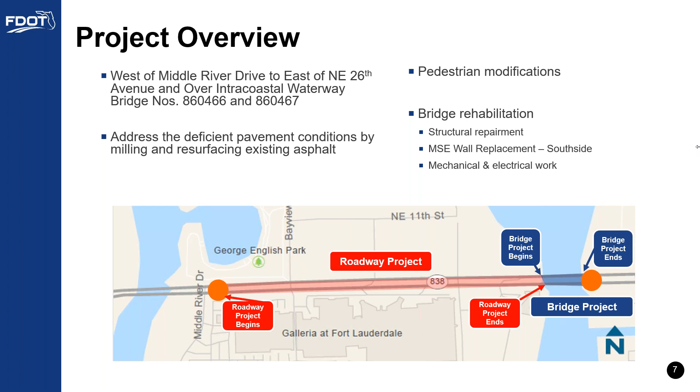The project is located in Broward County in the city of Fort Lauderdale. The project limits are west of Middle River Drive to east of Northeast 26th Avenue and over the Intracoastal Waterway. This project is made up of two components: the roadway project and the bridge project. The roadway project will address deficient pavement conditions by repaving the existing asphalt pavement and other improvements for traffic and pedestrian safety. The bridge project will provide bridge rehabilitation, including structural repairment to the bridge, mechanical and electrical work, as well as a tender house and parking area.

To talk about the Sunrise Boulevard Bridge project, we must discuss the current state of the corridor and bridge and the needs of the local and regional users. The Sunrise Boulevard corridor currently serves as a major roadway for all types of traffic and is bordered by many residential and commercial properties. The current corridor is reaching the end of its life, with worn-out striping on the roadway making it hard for drivers to identify their lanes, worn-out asphalt, and broken sidewalks.

The corridor must be repaved and resurfaced in order to last longer. This process will strip away the existing asphalt and replace it with new asphalt and striping. In addition, it can include enhancements in traffic safety, signing and pavement markings, lighting, signalization, drainage, ADA accommodations, and ITS.

Intelligent Transportation Systems, or ITS, is the use of sensing, analysis, control, and communications technologies in order to improve safety, mobility, and efficiency of ground transportation. ADA accommodations include a uniform walking surface to provide a smoother pedestrian experience.

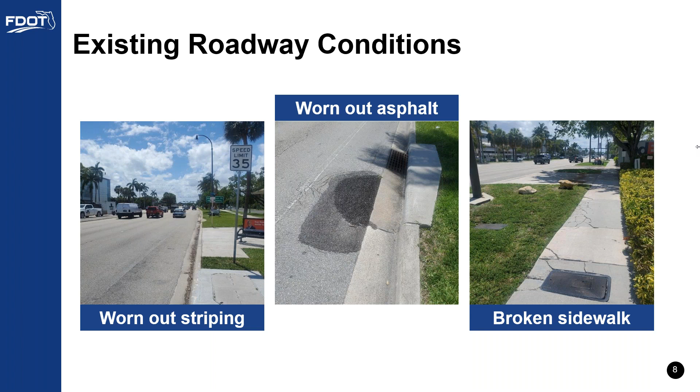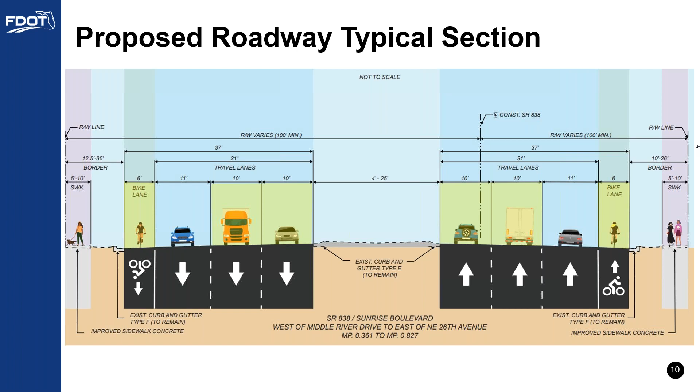The proposed roadway project typical section displayed here reduces the 2 inside lanes from 11 feet to 10 feet in order to widen the bike lanes from 4 feet to 6 feet on either side. The median will remain, and the sidewalks will be upgraded and improved.

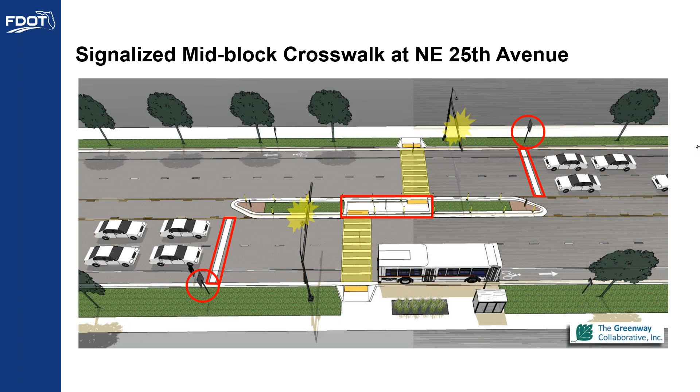Let's watch an informational video from the Federal Highway Administration on Pedestrian Refuge Island. As you watch, please keep in mind that this is an example of what will be implemented. Our mid-block crosswalk will be signalized, so traffic will be stopped in both directions to allow pedestrians a safe crossing.

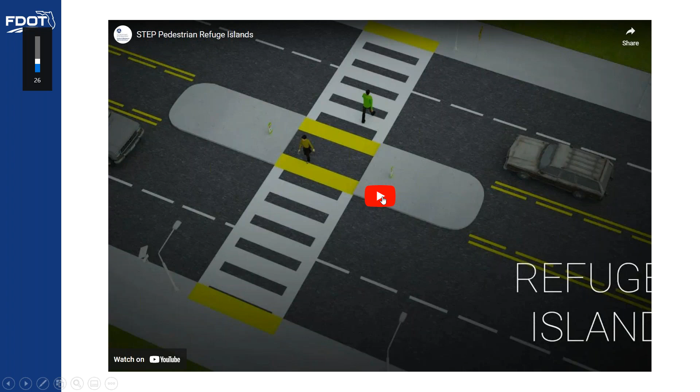In general, a safe place for pedestrians to cross the road is at a well-marked, controlled location, often at an intersection. But in 2016, 72% of pedestrian fatalities occurred at mid-block locations between intersections. So how do we reduce fatalities at these locations and provide safe transportation?

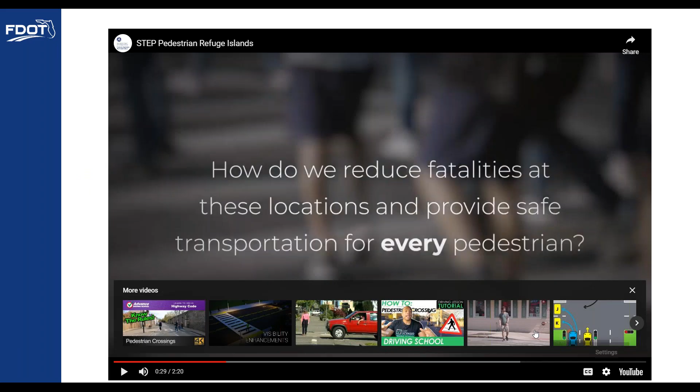The Sunrise Boulevard bridges also currently serve as a major roadway for all types of traffic and maintain the traffic heading to the beach. The purpose of the bridge project is to extend the service life of the bridge and address the glaring needs. The current bridge conditions can use improvements in the structure of the bridge span to create a safer path for pedestrians and bicyclists using the scenic route to access the beach, and the installation of a solid aluminum deck with electrical and mechanical work.

The south side of the MSE wall and the fender can use replacement. MSE stands for Mechanically Stabilized Earth. MSE retaining walls are the walls that line the supporting bases of bridge structures.

Lastly, to ensure safety to the tenders while arriving and departing from their shift, a tender house parking area will be installed near the tender house. As a result of this project, the bridge operation will be more reliable and the bridge structure will be more resilient.

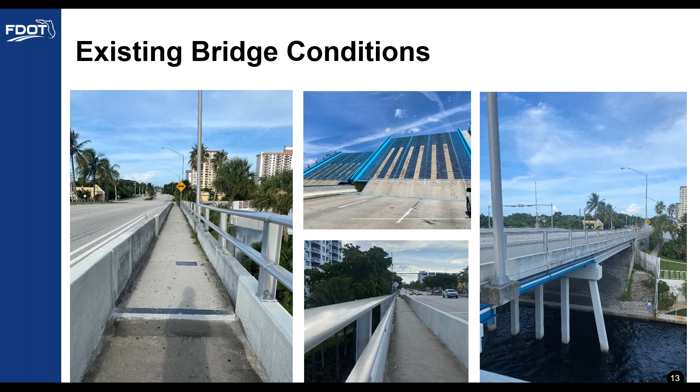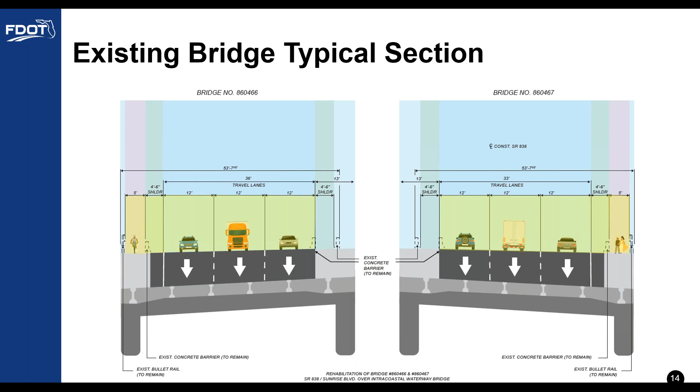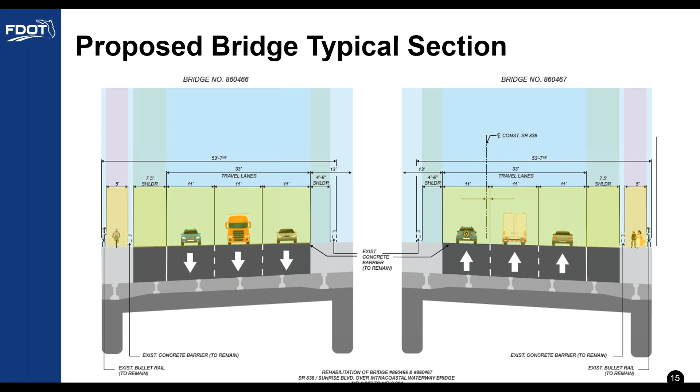The project team has received requests for protected bike lanes on the bridge. The team evaluated the potential for protected bike lanes, and it poses a hazard for bicyclists should the barricade be moved to protect the bike lanes.

The bridge leaves have joints on the bridge that allow them to open and close. The joint is circled on this screen. This point of view is from the opposite side of the bike lane, but we wanted to display a clear view of what the joint looks like.

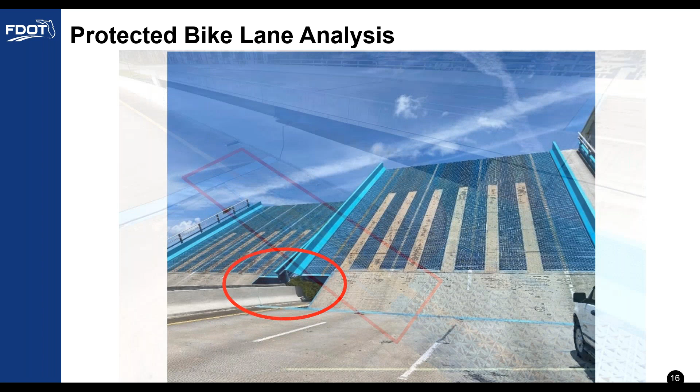When the bridge leaf closes, this is what the joint looks like on the roadway. Should the barricade be moved to the outside of the bike lane, the joint would be exposed to bicyclists, and it becomes a hazard as bicycle tires can lodge in the joint and cause an accident.

This point of view shows the bridge joint from the sidewalk where the future bicycle lanes will traverse. Currently, as you see here, this joint is under the existing barricades that protect the sidewalk and is not exposed to bicyclists and pedestrians. This project is a bridge rehabilitation and maintenance project to the existing bridge.

For the protected bike lanes to be incorporated into the design of the bridge, it would have to be a bridge replacement project in the future.

The shoulder widening will provide for 3-foot wider bike lanes on the bridge. They are currently 4 feet wide and will be 7.5 feet wide, providing more space for separation from vehicular traffic for the bicyclists.

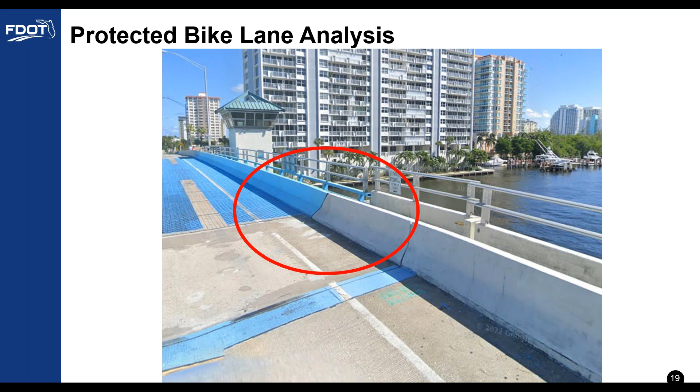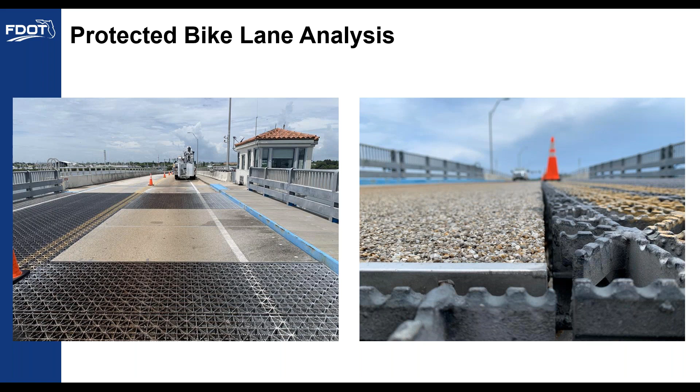The new deck replacement will also improve the riding experience for bicyclists. Here we see an example of the new aluminum deck next to the open grate deck that is similar to what currently exists on the bridge. As you can see, the aluminum gives a continuous non-slip surface that will provide stability for bicyclists.

Due to the highly trafficked nature of the project corridor, FDOT conducted a safety study on Sunrise Boulevard between Northeast 25th Avenue and Northeast 26th Avenue. The study made several recommendations for implementation, developed based on crash data analysis, field reviews, and operational analysis.

Recommendations include changes such as adding retroreflective border to existing signal backplates. This helps improve the visibility of the traffic light in a range of weather conditions, power outages, and for older or colorblind drivers. More recommendations include installation of signs alerting drivers to yield to pedestrians, increasing pedestrian crossing times, and many more, as you can see listed here.

The improvements have been or will be implemented by FDOT, Broward County, and the City of Fort Lauderdale. Broward County Traffic is here at the meeting to answer any questions you may have regarding signal timing surrounding the project.

Some of these recommendations are being incorporated into the Sunrise Boulevard Bridge project to meet the recommendations of the safety study, such as the signalized mid-block crosswalk that we discussed earlier in this presentation. For more information on this safety study, please contact the project manager. Their contact information will be posted at the end of this presentation.

Special events held in the area, such as Tortuga Music Festival, the Fort Lauderdale Air Show, and many others, will be considered by the department in the traffic control plan.

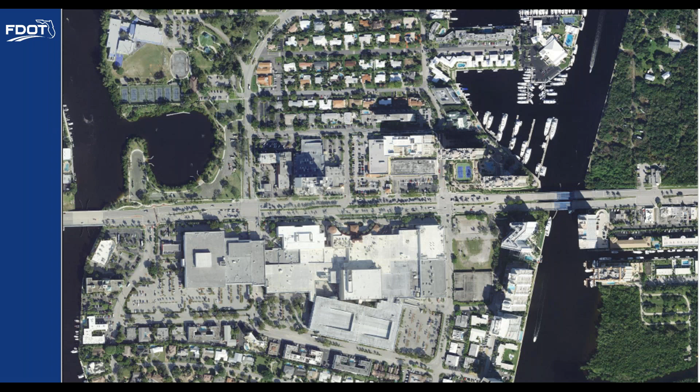We will now display a series of aerials of the project corridor with the proposed traffic control plan during construction. Red shaded areas are proposed lane closures. Green arrows depict the proposed eastbound flow of traffic, and blue arrows depict the proposed westbound flow of traffic.

Below each aerial, the lane closures and temporary lane restriping are displayed from the driver's point of view. The red shaded areas in east and westbound areas will be displayed on these graphics as well. Two lanes of traffic in each direction will be maintained throughout each phase of construction.

The bridge project traffic control plan is broken up into 2 phases. Each phase will be a period of 3 months. The time frame for these phases is still in the works, and the project team will try to minimize scheduling impacts. The traffic control plan timeline will be presented at the construction open house once the project moves into construction.

During both phases, the design team will install temporary traffic control devices, signs, and pavement markings necessary to maintain the flow of traffic. During Phase 1, the eastbound bridge will be closed for construction. The westbound bridge will be restriped to maintain the flow of traffic with 2 10-foot lanes eastbound and 2 10-foot lanes westbound. Pedestrians and bicyclists will share the existing 5-foot barrier-protected sidewalk during this phase of construction.

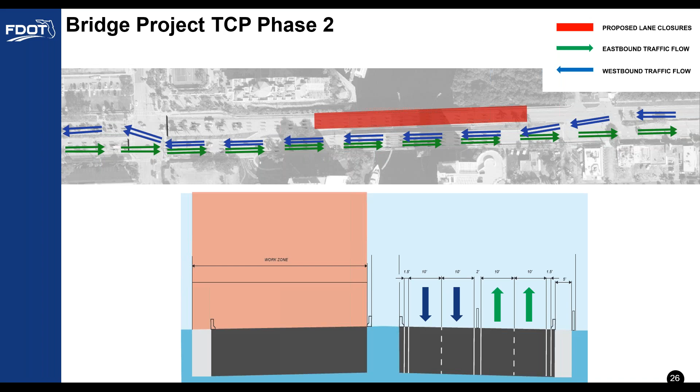The roadway project consists of 4 phases that help maintain the flow of traffic. During all 4 phases, the construction team will improve the pedestrian ramps, sidewalks, signals, and lighting. The work will be done on one side of the road at a time to always keep pedestrian facilities accessible. While working on stretches of sidewalk between intersections, the intersection crossings will not be closed. The curb and gutter segments will be under construction during off-peak hours of traffic.

During Phase 2, the construction team will install temporary barricades and signs to close the inside lanes. The outer 2 lanes going eastbound and westbound will remain open. The repaving of the left turn lane and inside lanes along Sunrise Boulevard will be performed during off-peak hours during this phase of construction as well.

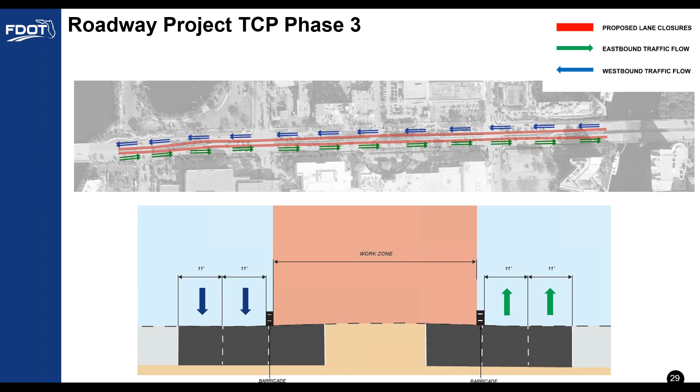During Phase 3, there will be closure to the inside lanes and medians. The outer 2 lanes going eastbound and westbound will remain open. Repaving of the left turn lane and inside lanes along Sunrise Boulevard will be performed during off-peak hours during this phase of construction as well.

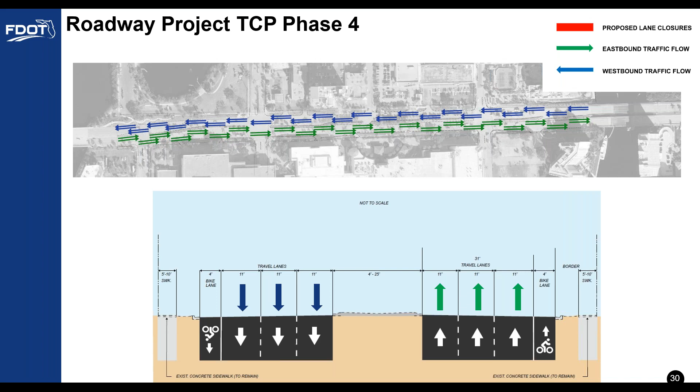Finally, during Phase 4, the construction team will install temporary work zone signs and place the finishing touches along the entire project limits, 1 lane at a time. During this time, the final pavement markings will be installed. As you see here, 2 lanes of traffic going in each direction will be maintained throughout construction of the project, resulting in minimal disruption to the flow of traffic and no access impacts to the surrounding communities and businesses.

There are proposed improvements that may have potential impacts to maritime traffic. These improvements include fender replacements, potential underwater cable installation, mechanical and electrical upgrades, and more. The team is coordinating with the United States Coast Guard and the marine industry to determine construction impacts and limitations to construction activities. The contractor will advise of any potential closures or changes should the need arise at the construction open house in the future.

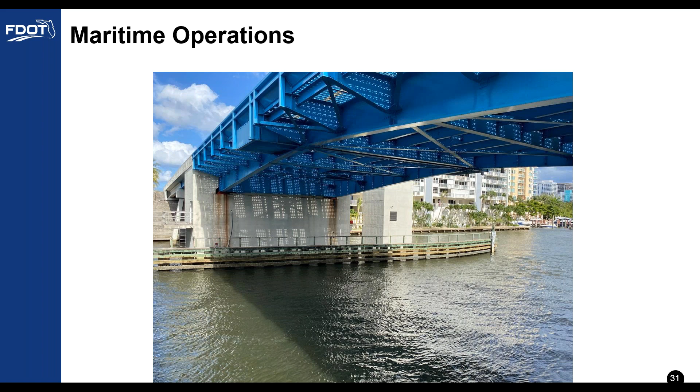There is no right-of-way acquisition for this project. All work will be done within the existing footprint of the project corridor.

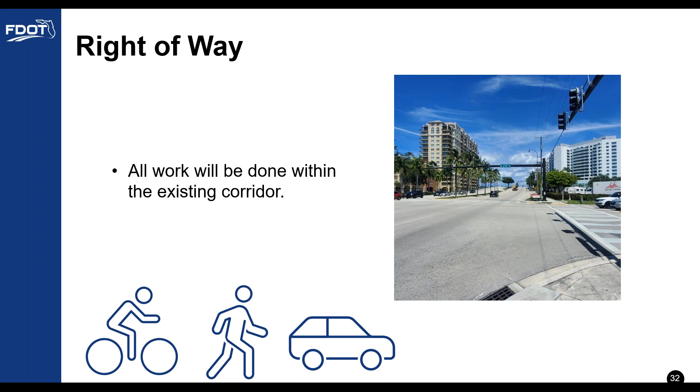Construction is planned to begin between the spring of 2024 and the winter of 2025 for both projects, and is expected to be completed in the spring of 2026. The estimated cost for the roadway project is about $1.2 million and about $25.5 million for the bridge project, for a total of $26.7 million. The team is currently looking at the logistics of each project, the roadway and bridge, to craft the most efficient plans for when the work will be done within the timeline.

FDOT is currently conducting a Project Development and Environment, or PD&E, study evaluating intersection alternatives at and along State Road 5 US 1 Federal Highway and State Road 838 Sunrise Boulevard that could reduce traffic congestion and delays, improve multimodal mobility, and safety in the area. This is better known as the Gateway PD&E study. The Gateway PD&E study is a different project than the Sunrise Boulevard Bridge project. Although it is in the same general location, it is down the street from the project we are speaking about today. Gateway is still in the planning phase, and Sunrise is in the design phase.

The Sunrise Boulevard Bridge project is anticipated to be complete by the time the Gateway project construction begins. As a resident or stakeholder in the area, we want to make sure you are aware that you may be receiving information from both projects at the same time. Please be sure to look out for notifications from both projects, as they are in different stages of development and will have various opportunities for you to provide input.

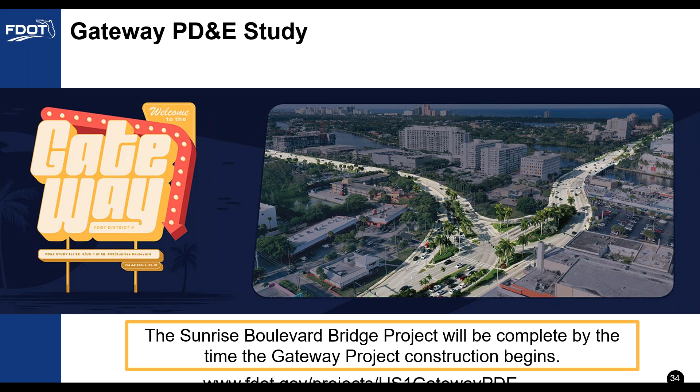For more information on the Gateway PD&E study, please visit their project website at www.fdot.gov/projects/US1 Gateway PDE.

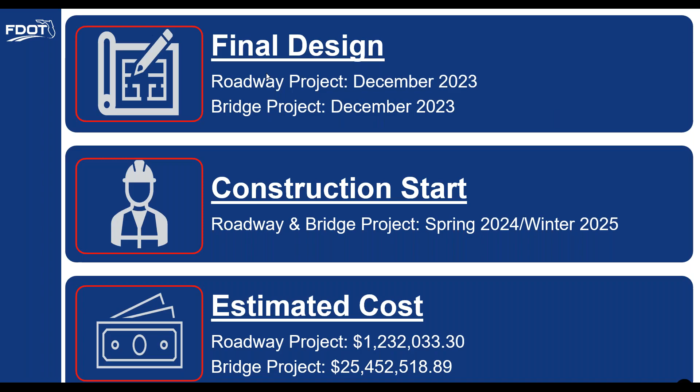We did take a look at that, and we did find some issues with it functioning - with really the function of the bridge and moving the barrier over. That has to do with the joints and how we would be able to functionally operate the bridge while also safely doing so for bicyclists and pedestrians alike. It's a bit more nuanced than just moving them from one place to the other, but we do believe that extra 3 feet would provide a net benefit.

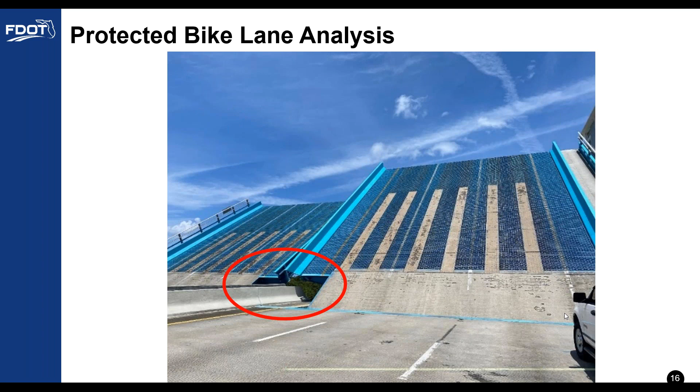Unfortunately, given the project constraints, we don't have enough room or latitude right now to do a full bridge replacement. However, that's something we can explore once the bridge reaches its expected lifespan, and obviously a study would have to be done subsequent to that to really flesh out the impacts associated with expanding the full footprint of the bridge.

This is Ron Sanchez again. I just want to clarify the difficulty we're having. The barrier can be moved. What can't be moved are the longitudinal joints, and the reason they can't be moved is because they're located based upon the location of the two main girders that support the entire movable span. So we can move the barrier, but to move the joints, we have to move the main girders - basically replacing the entire movable bridge structure.

Why is the joint an issue? Well, that longitudinal joint actually poses a danger to the bicyclist you're trying to protect by moving the barrier. Those joints are wide enough to actually capture bike wheels and would pose a risk to bicyclists using the bike lane.

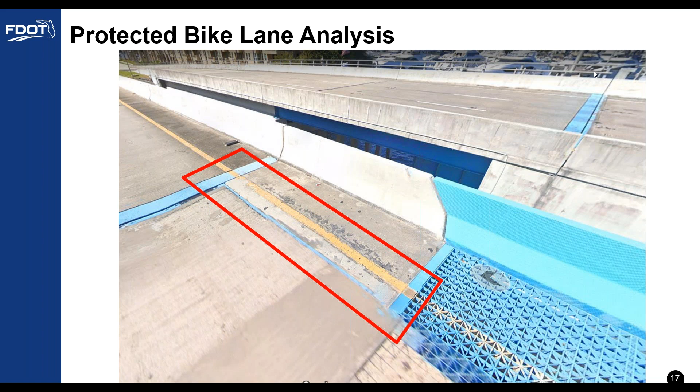So when we're talking about roadway volume, there's a low correlation with the expected width, and what we want to properly design for is not just vehicular traffic, but also pedestrian and bicyclist traffic. Given the limited amount of public right-of-way, it's a bit of a battle in how we can incorporate a lot of these elements within that given footprint.

But it's really state standard on minimum lane widths. We've been practicing for a while now taking some of that excess space from the lanes and redistributing it to the bicycle lanes and sidewalks. I will say though that we'll be providing sufficient room for transit services, so some of the more essential infrastructure such as buses will have more than adequate room to operate within the corridor.

We have a question on what are the drainage plans for the project? Being a resident of Fort Lauderdale myself, I am well aware of the flooding that occurred around the city recently. Regarding drainage, we did do an analysis and found that it does operate well for the large majority of the time. For special cases of flooding, such as the historic one that occurred recently, we did not take that into account, unfortunately, just because it was unprecedented, and within the confines of this project, it wasn't in the scope.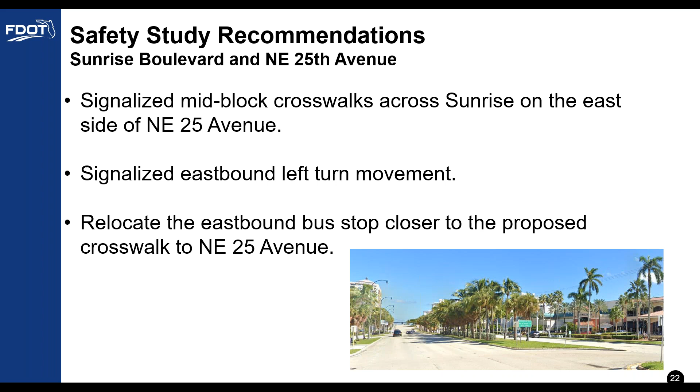This will discourage the use of speeding in that area. In addition, this was more of a compound question, also addressing the bus stop. We'll be working with Broward County Transit on looking at any efficiencies for the bus stops in that area, but it's more of a coordination conversation with Broward County Transit as well.